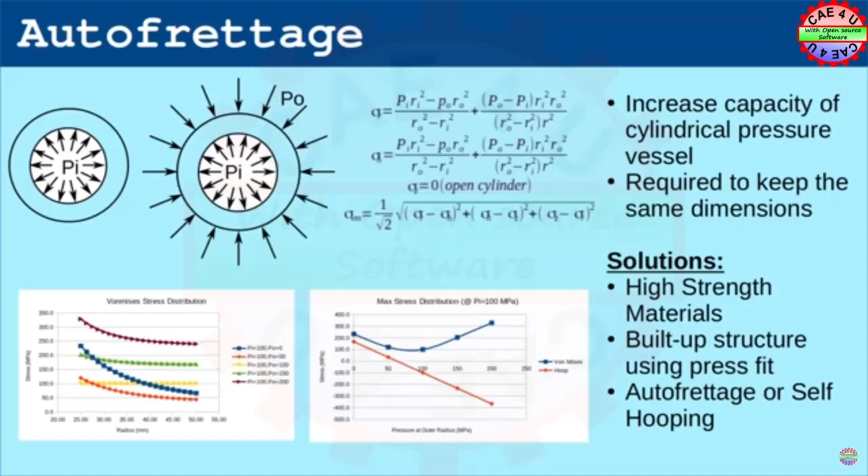While the benefit is evident, such complex simulations are tedious and often require elastic plastic material modeling. It is encouraging to see if such concepts can be extended to a torsionally loaded member. So in this video, we will see if such benefits can be obtained in a torsionally loaded member, with a typical application being torsional springs used in on-road and off-road vehicles.

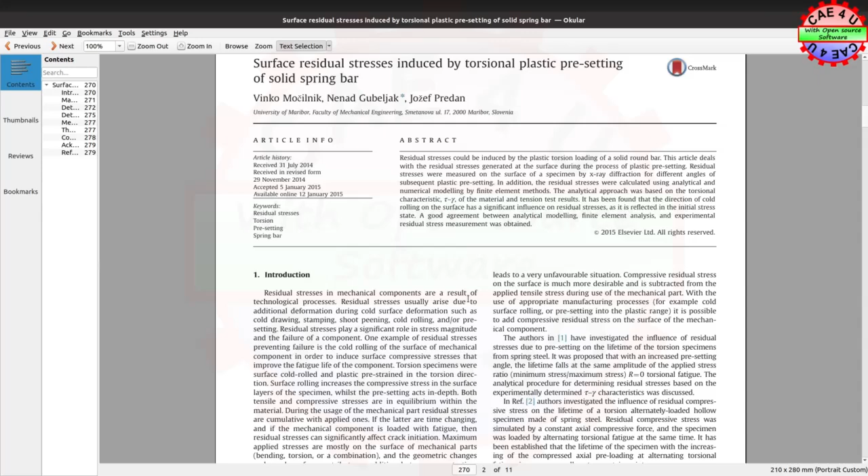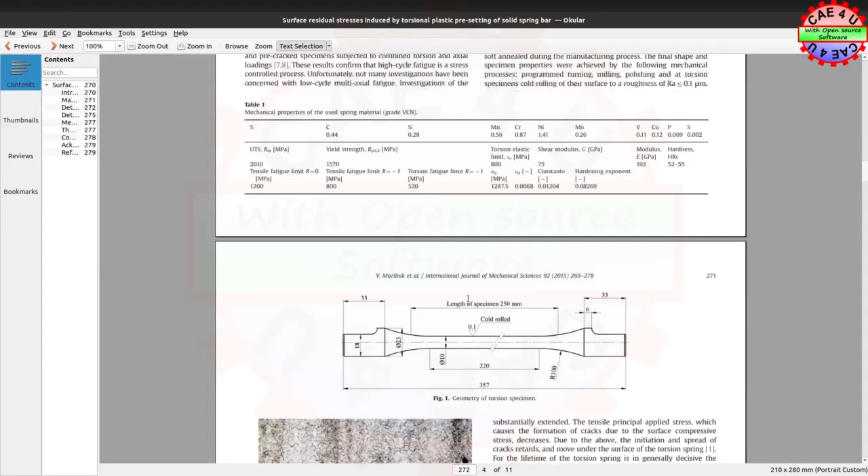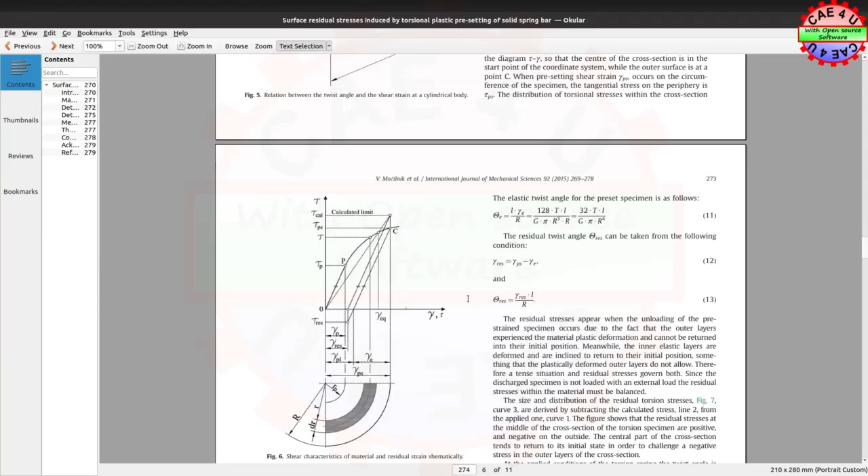While searching for previous work in this area, we found an interesting paper, and wondered if this simulation could be done using open source tools. Interestingly, the simulation in the literature was performed using Abaqus. We are hopeful this will be another case demonstrating the capability of open source FEA tools in performing industry quality simulations.

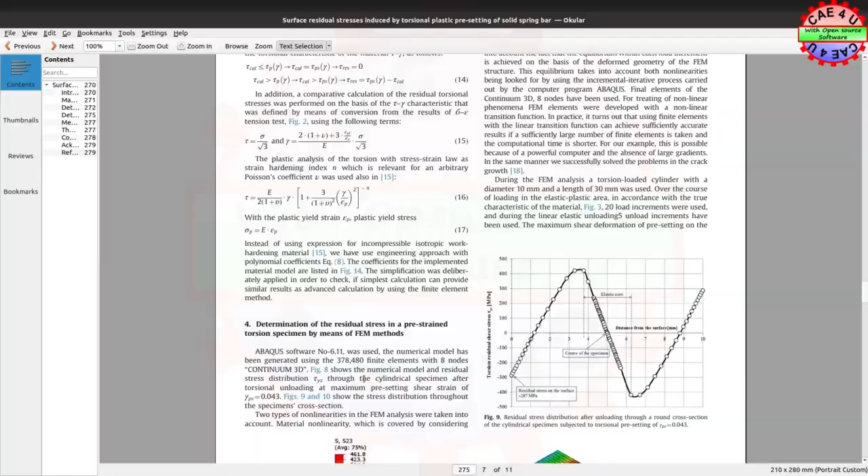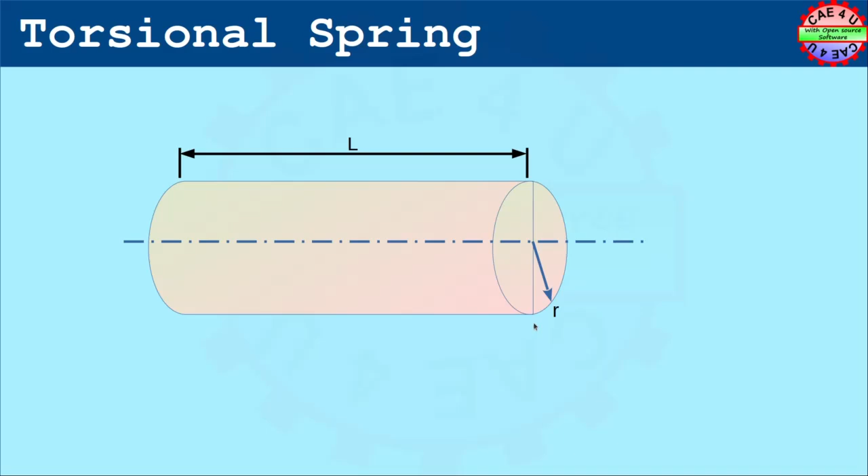To explain the model, the geometry is a simple cylindrical rod characterized by its length L and radius R. Though the behavior is expected to be two-dimensional, it is not possible to use 2D analysis within the software, necessitating a 3D geometry for simulation.

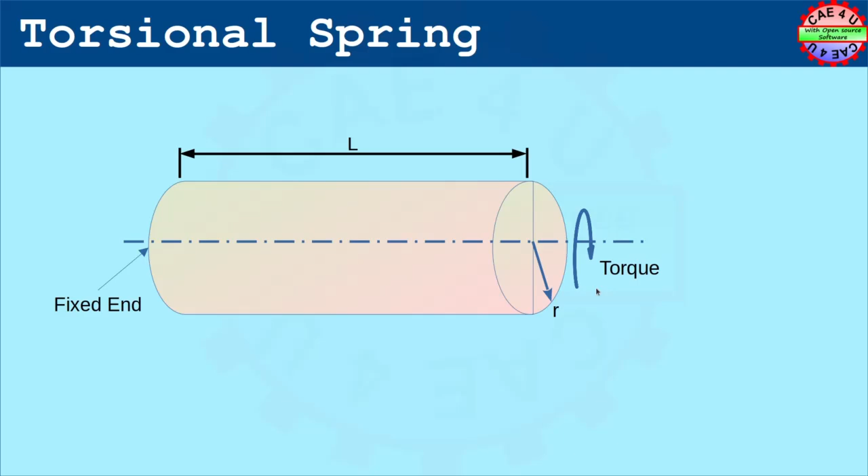The cylinder is fixed at one end, and twisting load is applied at the other end, which we call the free end. While twisting load is typically in the form of torque, angular displacement was found to be a more convenient load, since the torque is typically unknown upfront in the simulation, whereas the initial loading is convenient to specify as angle of rotation.

Further, angular displacement is a better form of loading from a convergence standpoint too. Once solved with the angular displacement, it is possible to obtain the equivalent torque and subsequently apply the torque load.

Hence, the simulation was planned in sequence: the first load case would be displacement controlled, and the next would be torque controlled. So the first load case is controlled by subjecting the free end to an angular displacement theta.

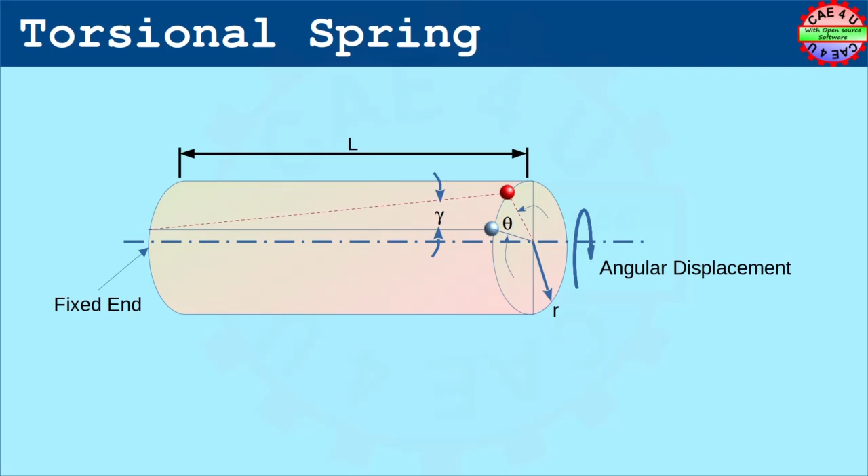This is again to make the load condition compatible with the software. However, in the literature, the angular displacement from the fixed end was provided, which we call gamma. Since we need theta, it is necessary to convert gamma into an equivalent theta. This can be calculated using the relationship R times theta equals gamma times length L, and hence theta equals gamma times L divided by R.

Now we have obtained a loading condition for the simulation.

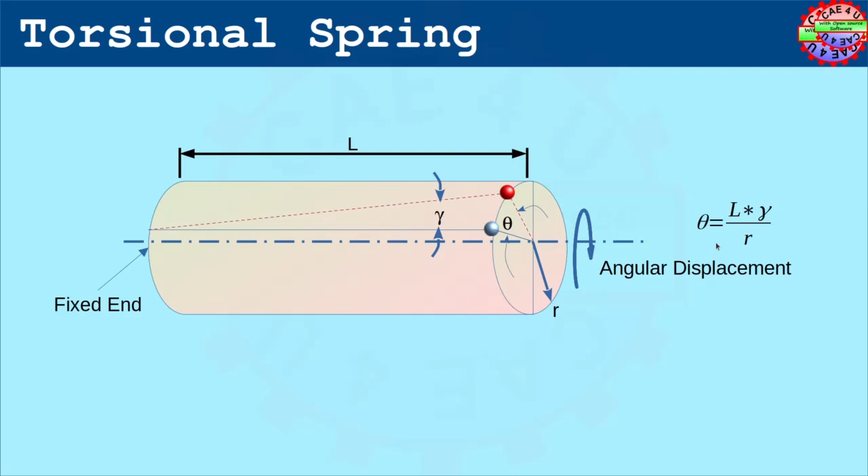In order to ensure the solution is comparable with the literature, the material properties were extracted from the material curve specified in the paper, and the material constants were considered to be the same values. The plastic portion of the material curve was obtained by digitizing the curve from the literature and further processing to obtain the plastic strain, with the data adjusted to account for small calibration errors. We used the default material hardening model, though it can be extended to other models if necessary.

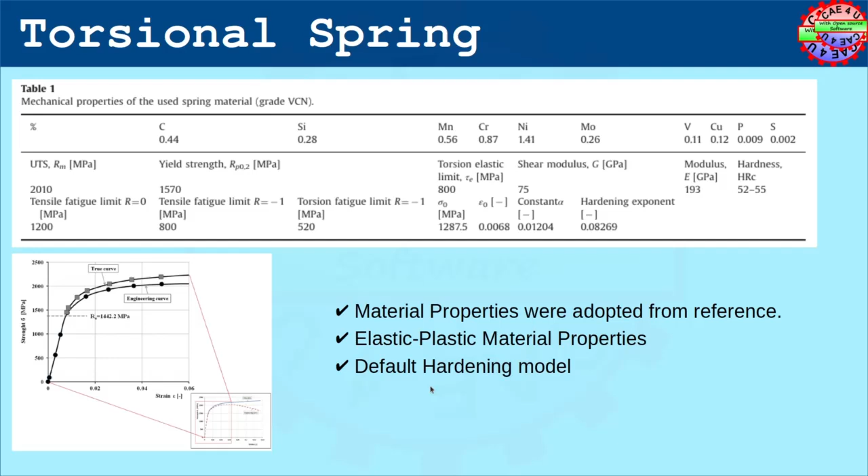The simulation workflow is as usual. We created the geometry using FreeCAD, consisting of the rod with dimensions as specified in the reference, and also created a slicing feature to enable a structured hex mesh.

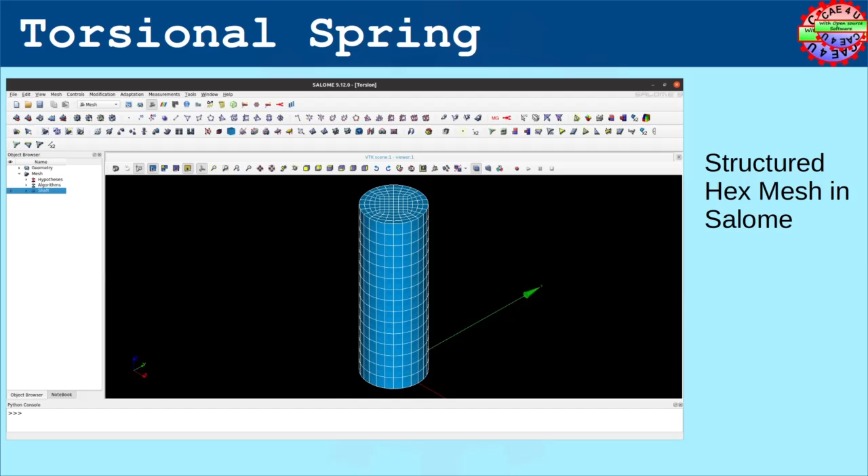We did the meshing using Salome. A modest refinement was made, balancing accuracy and resource utilization. We did the solving and post-processing in Calculix.

As stated earlier, the entire simulation can be essentially divided into two sequential load cases. The first load case is the displacement control load corresponding to the so-called presetting condition.

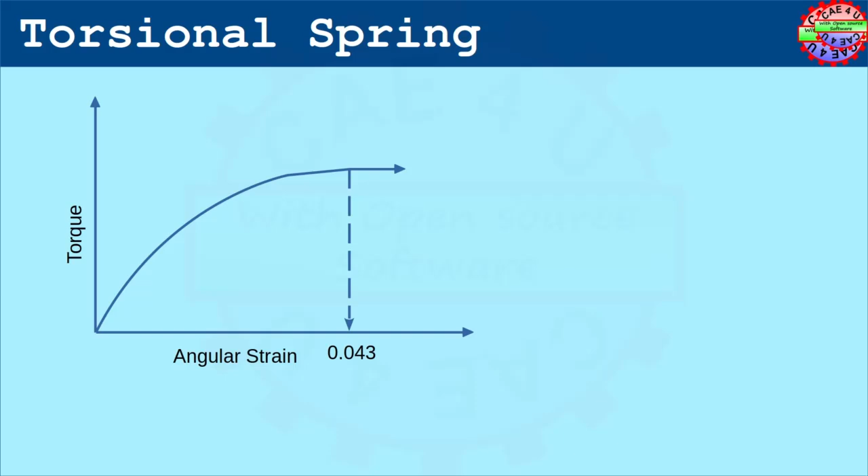From the literature, the corresponding condition is to ensure gamma to be 0.043. Based on the dimensions, the theta value corresponds to 0.258 radians.

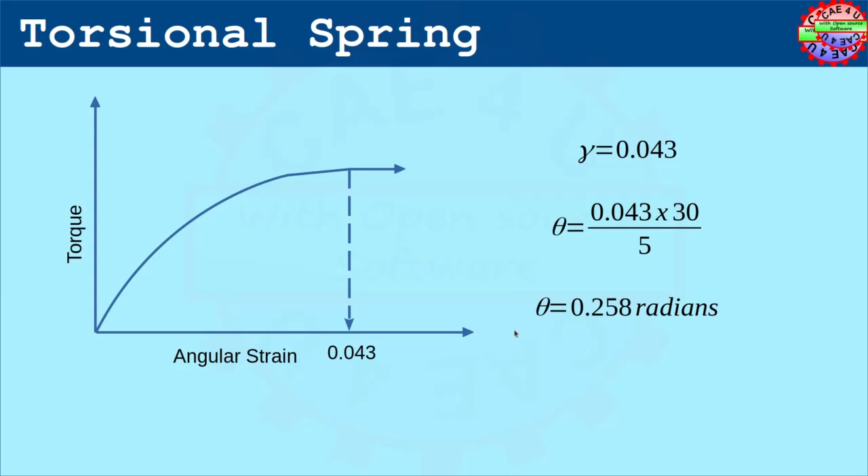The loading will stress the component beyond yield, and in the software it is possible to obtain the corresponding torque for subsequent analysis. The torque value corresponds to 278.24 Newton meter, while the result obtained using Abaqus reported in the paper was 284.2 Newton meters.

This is about a 2% difference. While we will compare all the results later, this comparison is essential to proceed to the next step.

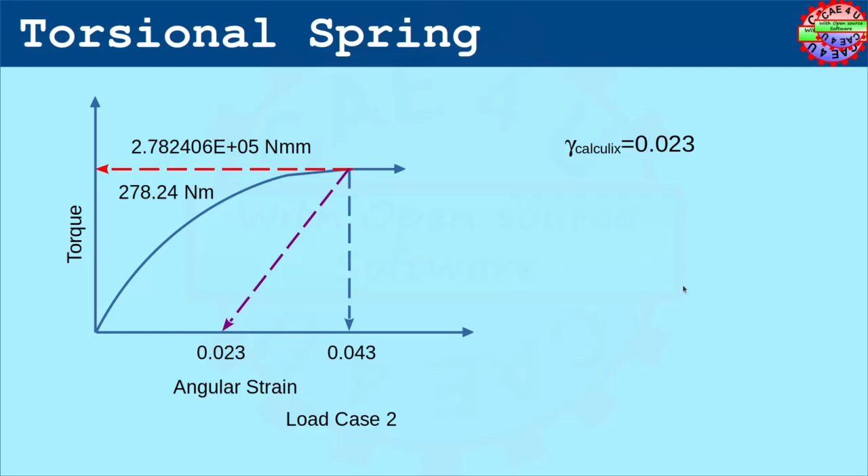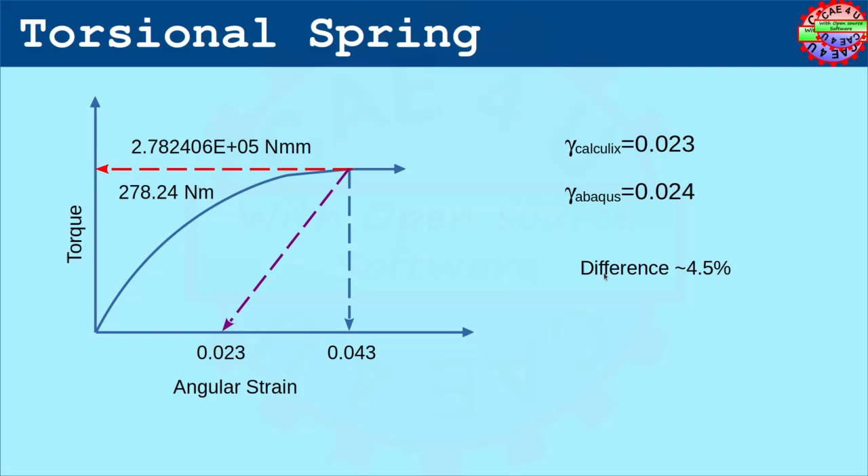Now, this torque is applied and released in the second simulation. We notice that the residual strain is 0.023 while the reported value is 0.024. We see the results are reasonably close, that is, within 5% difference.

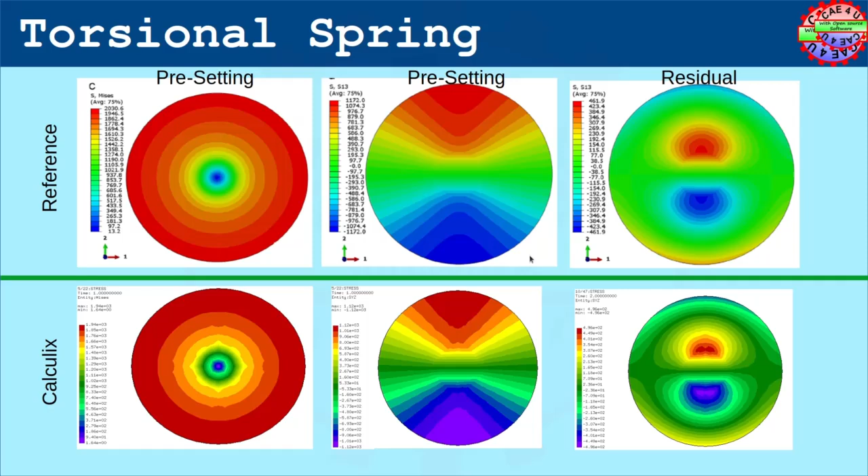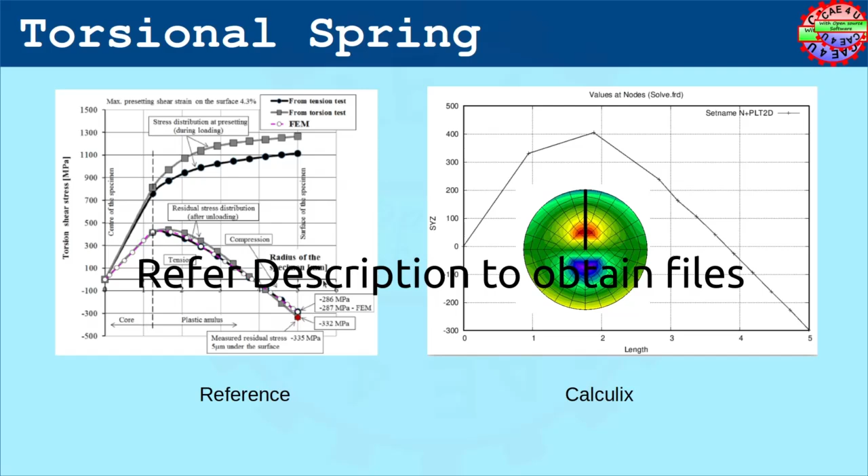To take a deeper look, we measure the residual stress across the radius and compare against the published values. To our surprise, the results compare very well with the literature, even quantitatively.

Though a further refinement and mesh realignment could produce a smoother curve, it is interesting to note that Calculix results of 298 megapascal residual stress is even closer to the experimental value of 335 megapascal, measured 5 micrometers beneath the surface, versus 287 megapascal reported in the paper.

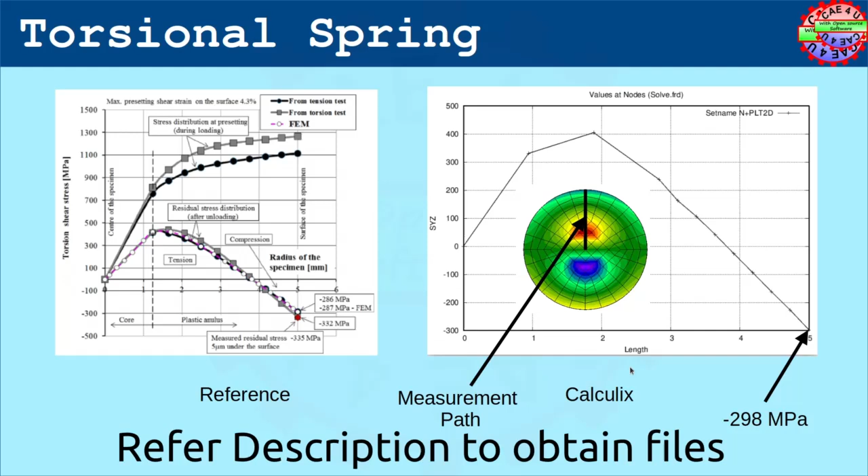Let us look into the summary of various output values between reference and Calculix. We could make out that the results agree very well. It indicates that the modeling approach is consistent and we can expect good quality results.

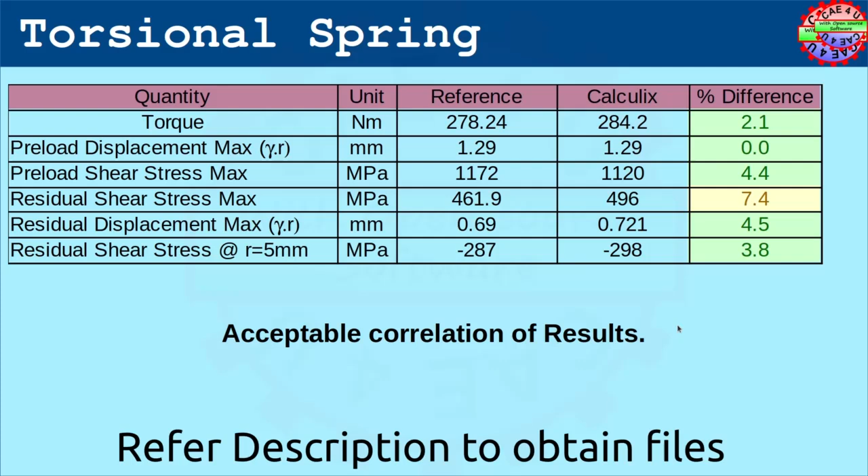While performing this simulation, we also observe that the result obtained can be further useful to calculate the stress ranges more easily. Since the residual stress will be constant for a given presetting and the subsequent loads would typically be within the elastic range, a simple calculation using the strength equation can be used to assess the favorable stress range.

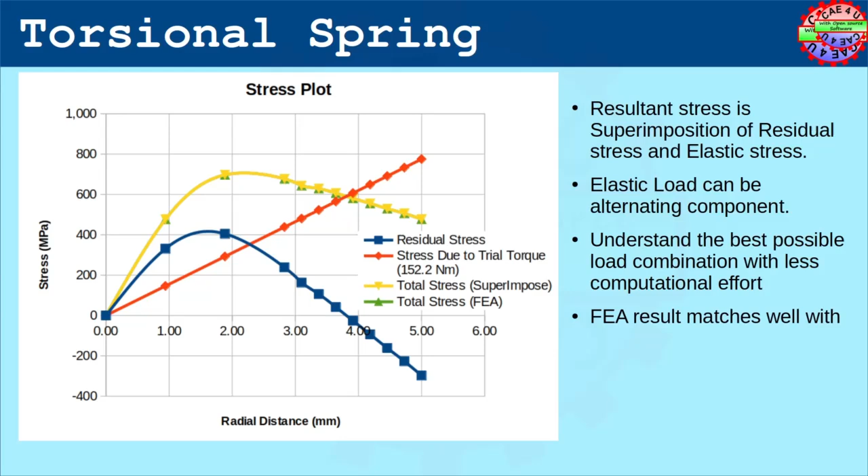This is possible because the resultant stress is an algebraic combination of the residual stress and the elastic stress. Note that if the applied load crosses elastic limits, superimposition would not work.

We found this method advantageous because finding the best possible combination is iterative and FEA can be costly for larger models. It further becomes more complex in the presence of stress risers like splines or steps in the rod.

If you are interested, you can watch our previous video to see how stress concentration is modeled using FEA.

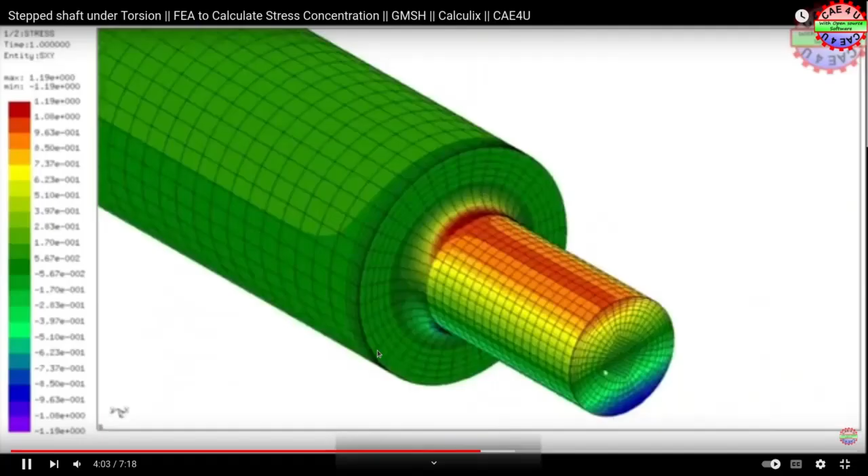Coming back, to verify if superimposition works as expected, the simulation was extended to reload the model from the residual stress condition. A torque value of 152.2 Newton meter was selected, corresponding to the maximum shear stress of 775 megapascal.

As shown in the graph, the results are identical, which confirms this approach can be reliably used within the previously stated limits. Lastly, we would like to highlight the resources used.

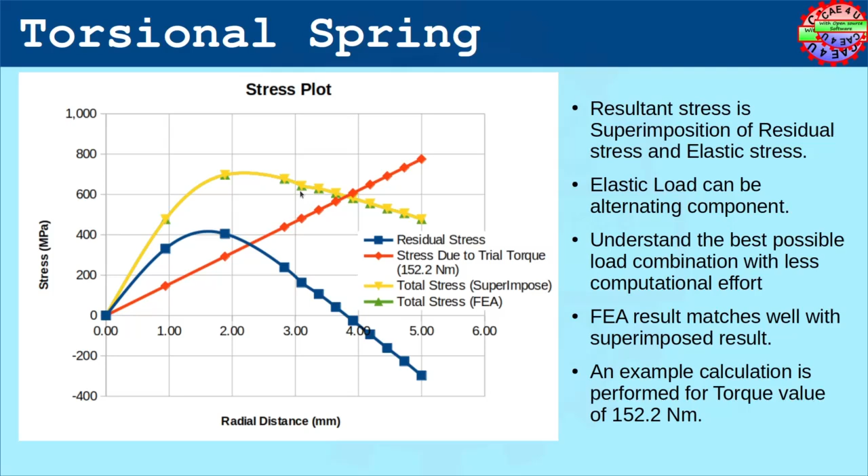In a 4-core machine, it took 407.5 seconds for solving. This is about half a core hour runtime, which is a resource efficient approach for the accuracy level.

Yet again, Calculix proves to be an excellent open source software in simulating complex physical problems. Thank you for watching.